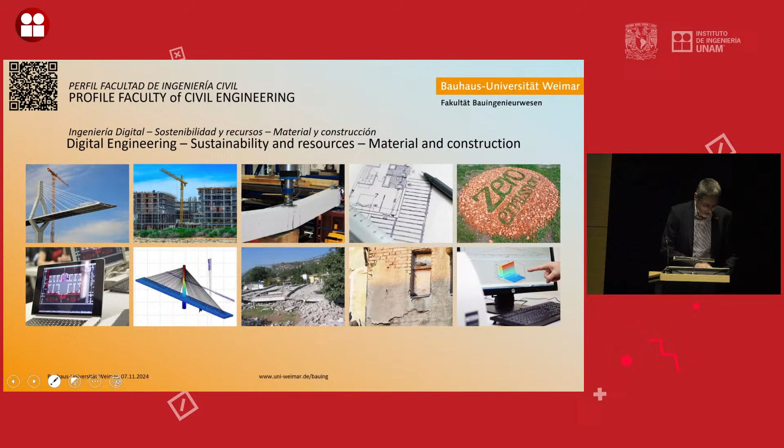As some key aspects, Bauhaus stands also for something, for experimenting. Bauhaus stands from our point of view for willingness to experiment, openness and creativity. So we try to combine this along our research and teaching.

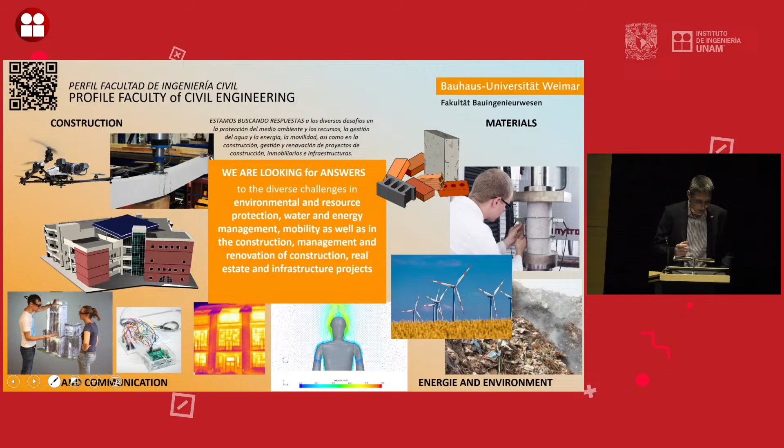So here just a brief look at what we are doing. We are using modern technologies, we are doing testing, we are in building physics. So whatever you can imagine, we are dealing with it. So in energy and environment, for example, but also very much in construction.

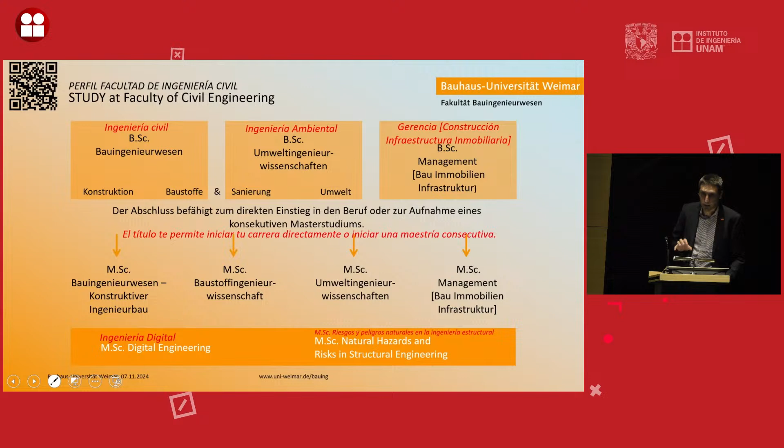And as a very brief information, we have principally 3 different bachelor degrees, which are held in German language only. And then we have some consecutive master studies programs. Some of them are fully taught in German, but we also have 2 English language master courses.

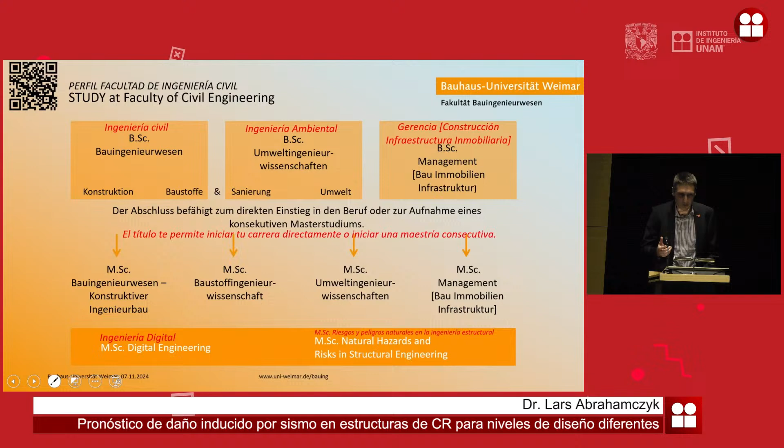One is dealing with digital engineering, so this is on the bridge between informatics and engineering, and especially from media informatics. And we have this master course, Natural Hazards and Risks in Structural Engineering, which addresses natural hazards in the sense of a structural engineer. So we as the structural engineer will deal a lot with natural hazards, but at the end we are still a structural engineer.

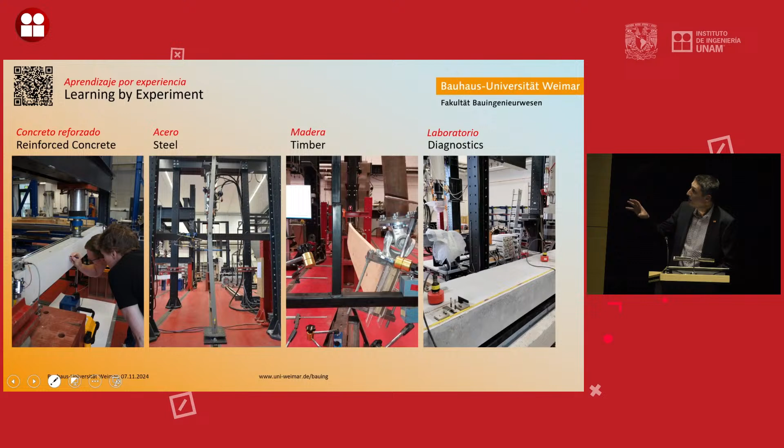So if you look a little bit more into this program, we try to learn from experiments, because we are Bauhaus, so we do a lot of experiments in our facilities, doesn't matter which type of material, reinforced concrete, steel, timber. We have a lot of stuff for doing diagnostics.

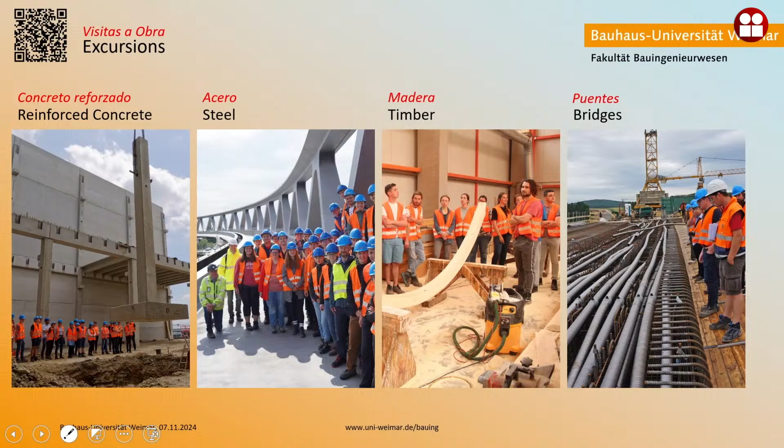But we also go on excursions with our students to visit construction sites, to really learn from the practice. And also here we do it for reinforced concrete, steel, timber, bridges, whatever is in the vicinity, we try to visit together with our students.

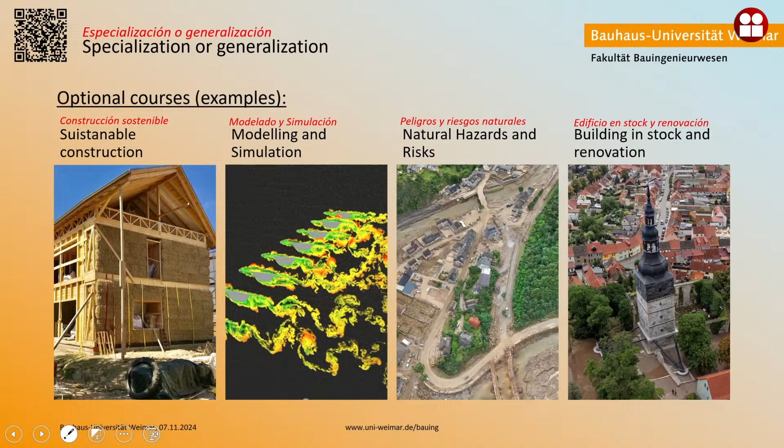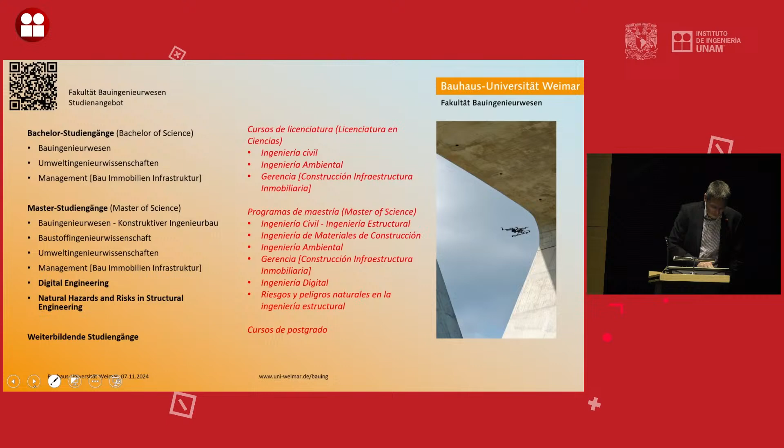But as I mentioned, we also do a lot in the direction of natural hazards and the evaluation of our building stock. We do some project thesis. We are part of the global teamwork project. We do structural design, bridge design, and this is, I think, quite common among the different universities. So if you want to get more about the study program, feel free to approach me, and then we can discuss this.

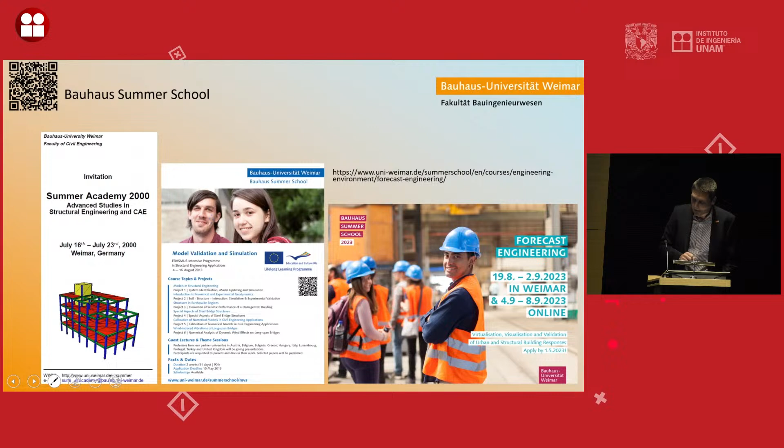And 2 more slides about the master study program, natural hazards. You might imagine, why natural hazards in Germany? Because we have natural hazards as well. Might be not strong earthquakes, but we have flood events, we have storm events, but we also have a tradition to deal with earthquakes because we went into the field to learn from earthquakes, and our target is not only the German market, so we are addressing actually national, regional, and international students.

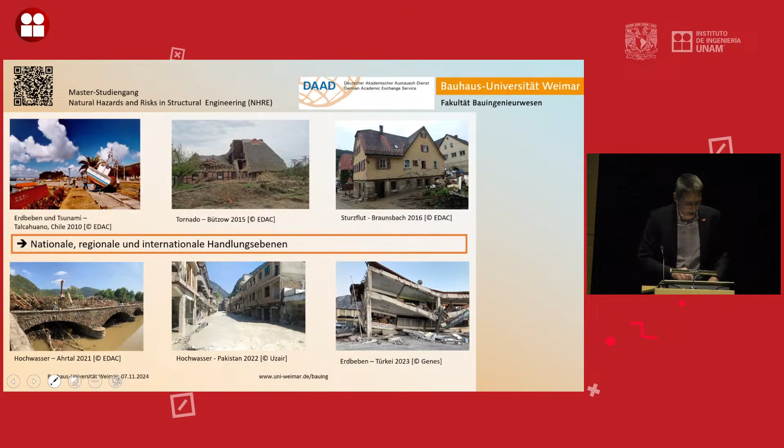And what we do is we actually try to cover the whole cycle of resilience or recovery, or the process of a natural hazard. So we have to deal with aspects before an event, during the event, after the event, and if you are after an event, you are again before an event. So that's always the cycle, and this is what we train our students in this study program.

So if you would like to know more, we can discuss it afterwards. This gives you a brief idea about what we are doing in Weimar as a small university with, from my point of view, quite powerful topics.

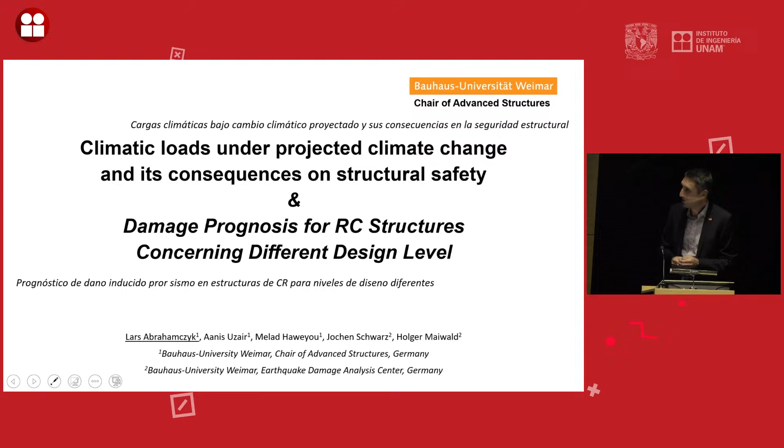So now I would like to talk about two things. Differently from the announcement, I will start with the climatic loads, and then I come to the damage prognosis, because the climatic loads is a little shorter one and hopefully also quite interesting for you. So what is the starting point? I think everybody knows climate change is there. This we don't have to discuss anymore. There are many people who have talked about that.

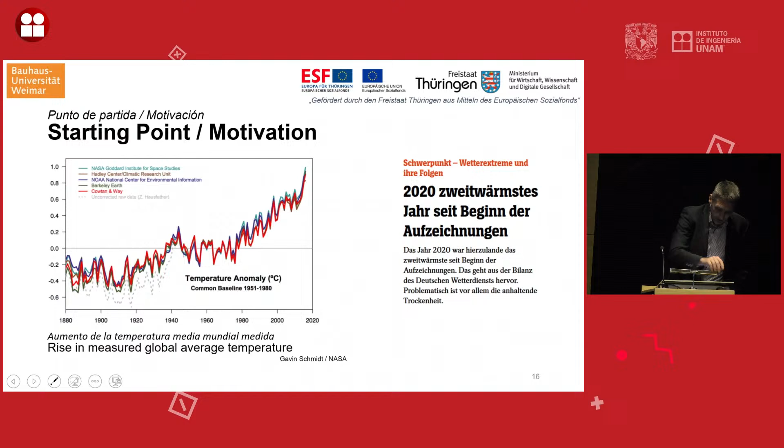But we ask ourselves, what does it cost us as structural engineers? What might we have to change in our design practice? And the starting point, of course, for the motivation is the increase of temperature, what we have already seen, what is always discussed. And of course, motivation is also some observations. This is quite locally.

So in the last, I think it was 2005 or something like that, we had a very heavy ice storm in Germany, which caused collapse of our power lines. Because at that day there was a lot of ice hanging around the cables, and the cables got so heavy that the masts couldn't carry them anymore. And that was due to a climate effect.

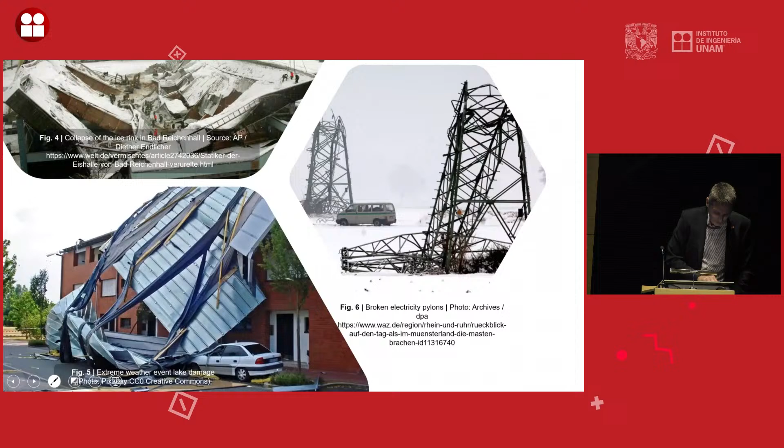On the other hand, you might see some storm events, and the upper one is also a heavy snow load on a roof, which caused the collapse. So that means there are effects which are structurally relevant. And what we did, we investigated two aspects. We had a project funded by the federal state of Thuringia, and we investigated the structural integrity and the room climate. Room climate I will keep a little bit separate. I will just focus on the structural integrity.

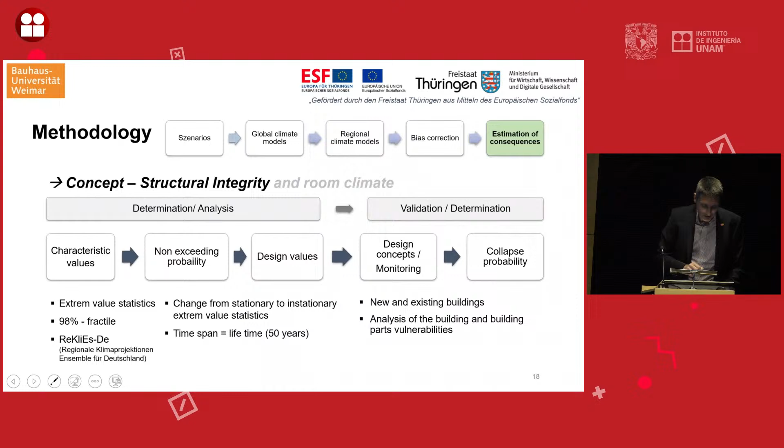And so we had to go into the analysis of the recent climate data and the predicted climate data, and then to look into the design concepts, the design values, and at the end to look into the probabilities. And similarly, we did it for the room climate, but let's go a little bit fast. So what is the methodology? First of all, we look to the scenarios. I think the scenarios are quite known nowadays, because it was talked about a lot.

So now the methodology. What we did, we looked at the global climate models, which are done by the climate people. They produce these kinds of global models where you can see how the temperature will increase over the whole world, and you see areas which really increase in temperature, but the question was, what does it mean locally?

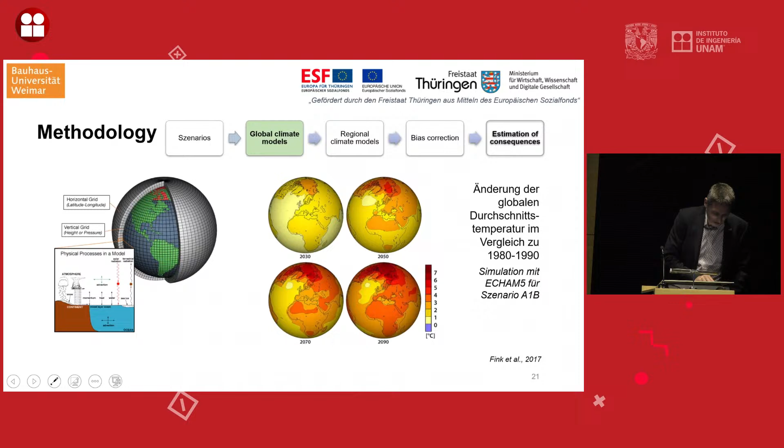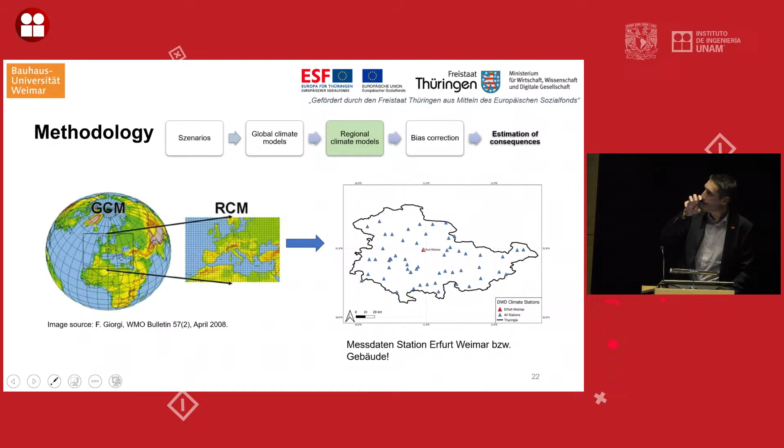So that means from the global model we had to study the regional model. We took out of the global model these regional models, which is also still done by the climate people, and then we looked to some climate stations in our federal state, Thuringia, where we are in Germany, just a small piece of Germany, to take the global model to the regional model, bring it to the local point, and then investigate it more. And for that, there's one step in between.

Typically you look to the historical data, and then you add the simulated data. And at the same time, you can compare this with the measured data. So the people from climate do some historical simulation and some prediction simulation, to look into the future. And beside that, you have the real measured data, and this doesn't fit perfectly or not at all, and that's why you have to do a so-called bias correction. You have to adjust this so that you are in the same line.

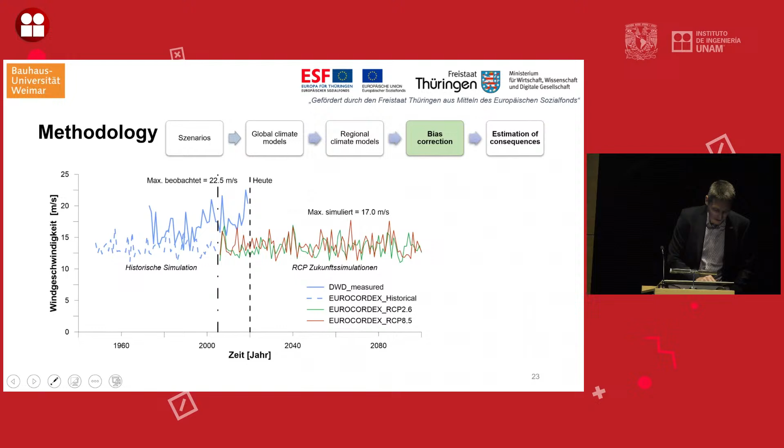Beside that, we developed, for research purposes, 2 stations to measure our own data, so that we can derive the proper data. But what is now the methodology? I think that's a little bit interesting. We have the climate data, the raw climate projection, we have the observation, we do the bias-corrected climate projection, and then we have to do the extreme value analysis.

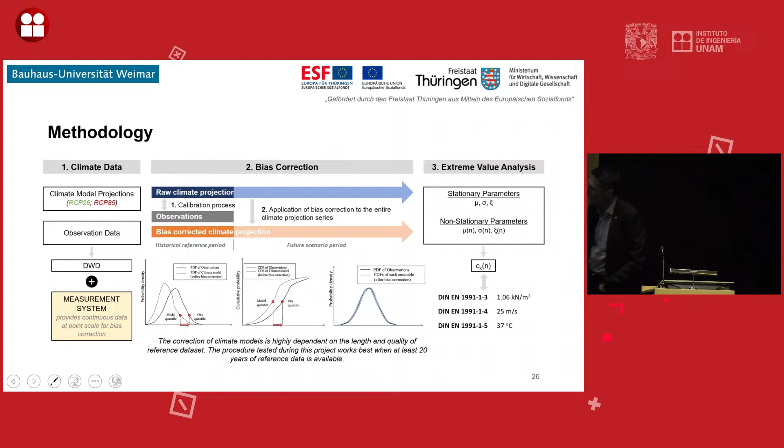Because what happens now is that the climate isn't steady anymore. Due to climate change, we can't actually look into the past because the physics has changed. And that's actually the key problem, why we have to do some extreme value analysis to make some predictions, because at the end of the day, this part here changes in probability, and this is actually the part which defines our design values, or the characteristic values which we take into consideration to design structures.

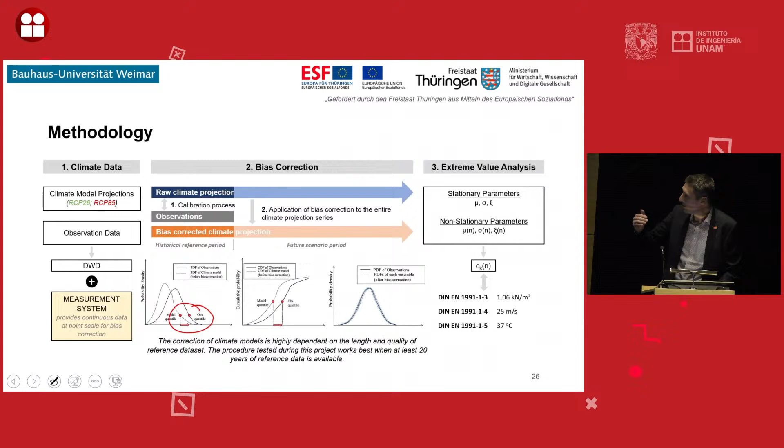And because the extremes change, the tail in our probability distribution changes, and this is what we have studied here. And we compared this for the German standards with respect to temperature, wind, and snow.

And therefore, what we did, we took the 2 climate projections, the RCP 2.6 scenario and the 8.5 scenario, and there are a couple of climate models. There is not only one model. There are many, and at the end you have to study all to see what might be the final result. At the end, you still are in a range how this weather might become in the near future.

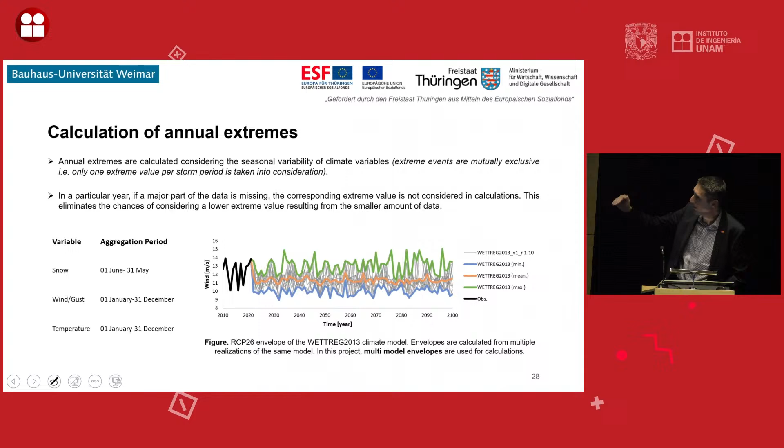So then you have to aggregate the data. So here you see different ones. So one scenario with mean, min, and maximum. And then you have your observation, and this you have to compile and do some analysis.

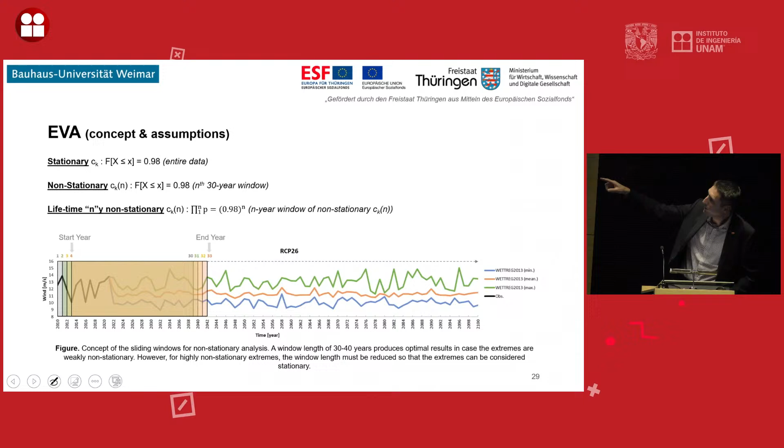And for the extreme value analysis, in the past we used the stationary approach, where we take a time window of 50 years and look into the probabilities for this data set. And in the past, we could say the quantile is 0.98, or this 2% probability, and this for the stationary approach, assuming that it was the same over the last years.

But now it changes, and then actually you can't go with a stationary approach anymore. You have to go to a non-stationary approach, and typically you take time windows of 30 to 40 years, and then you shift this into the future to calculate your probabilities. And if you do that, you can come up with some probabilities, and you can look at, for the given probability according to your code, how things might change.

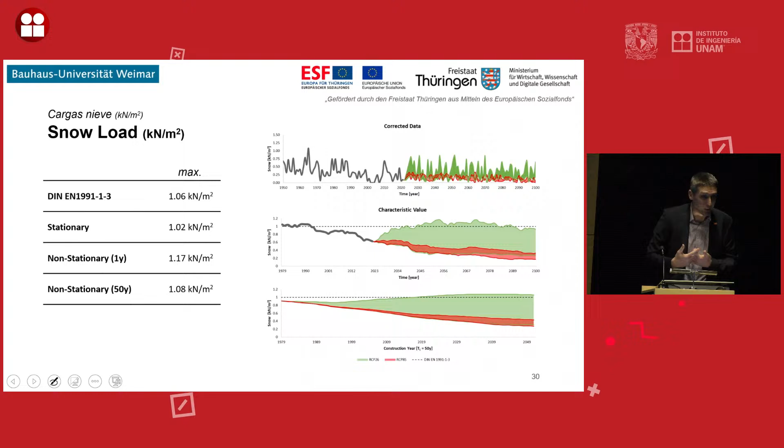And here we see, for example, the snow load. Of course, due to climate change, we increase the temperature, so the snow load probably decreases. But that's not always the case. There are also some scenarios where it still increases. So the green one would be the scenario that we manage our climate, and the red one is the worst scenario. And of course, for the worst scenario, we have an increase in the temperature and a decrease in the snow load, for our particular region.

So at the end, this is very much addressed to what we have on the local side. Of course, there will be regions in the world which get colder, and then you have to adapt this for that particular region.

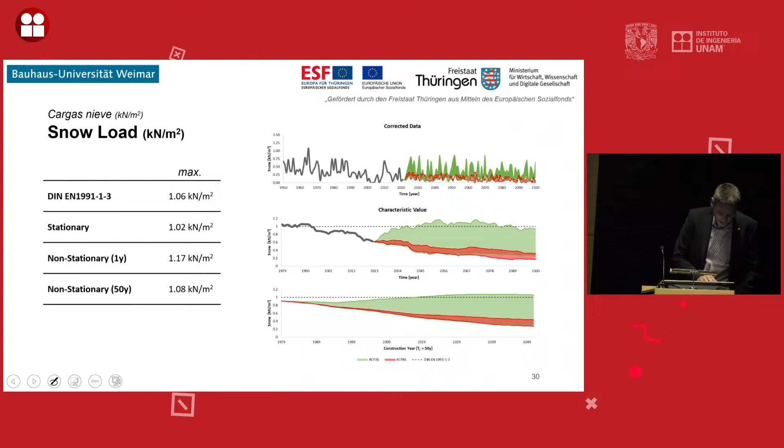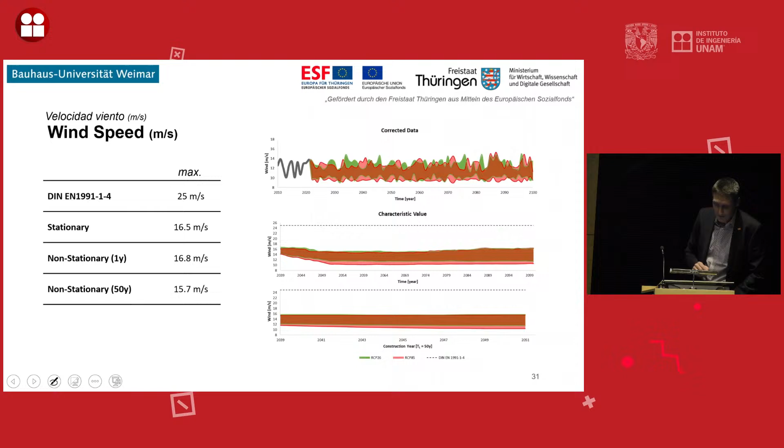So if you look at the wind speed, wind is also quite uncertain, I would say, because here you see not that much difference between the models. This is something which is not well solved in the climate change models yet. So we couldn't really identify a trend. It's more or less straight, independent of how much the temperature changes or which scenario you are in. So from the wind, we couldn't observe too much.

The same if you look at the gust wind speed, there we also didn't find too much. The problem here is that in the climate models, we actually don't see real storms. What is classified as a storm is difficult to extract out of the climate models. So from that point of view, the data doesn't help us too much.

But of course, the most trend you see in temperature, and temperature is something which might be relevant for design, not for every building, but for temperature-prone structures which have an expansion, like bridges, for example. And there we could definitely observe a trend in how the temperature will change, similar to what others have predicted, but now in the sense of the probabilistic approach, how much it might be relevant to our design concept in the future.

And now the problem which results out of that is, in the past, our design philosophy was looking into the past and taking the same into the future. That means looking in the past, calculating a probability, 2% exceedance probability, and taking it into the future as well. But now the temperature increases in the future, and it doesn't work anymore.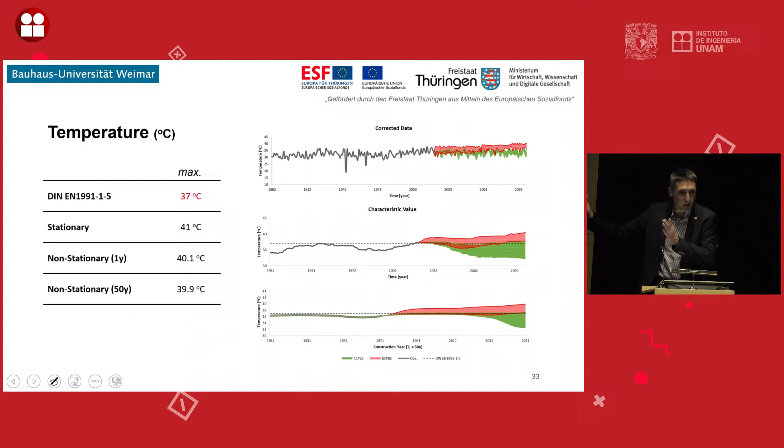And that actually leads to many distributions. So temperature, for a building lifetime of 50 years, from 2051 to 2100, if we go into the non-stationary concept, we reach a temperature between 38.5 and 40.5 degrees. But the question is, how do we now consider our probability? So far we say 2% probability in 50 years, 0.02. But the question is now how to sum it up.

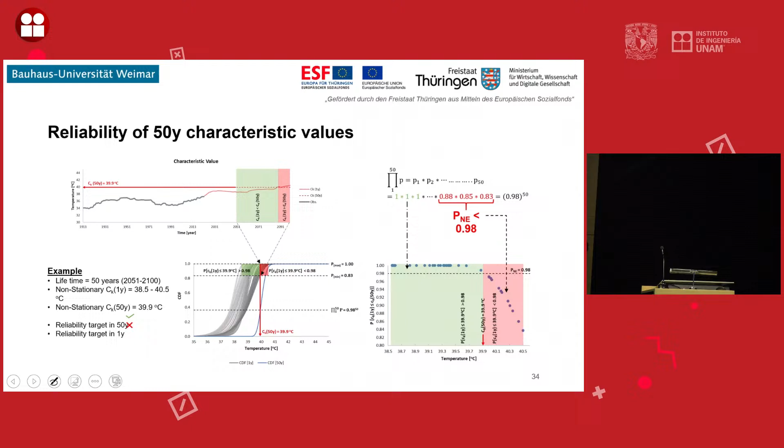This happens from time to time, or every year more than 2%. But the question is, how do we see this over the whole lifetime of the building? Do we accept more often in the future an increase of the temperature? Because that's the probability concept: we accept a certain probability that our design value or characteristic value is exceeded.

We could say we don't accept it for a very long time, but at the end of the lifetime of the building, it will be accepted. Or we say, very conservatively, that the whole probability should still be this 2%. This is a philosophical question which we can't answer, because this is a community problem, how to deal with this increase in the future.

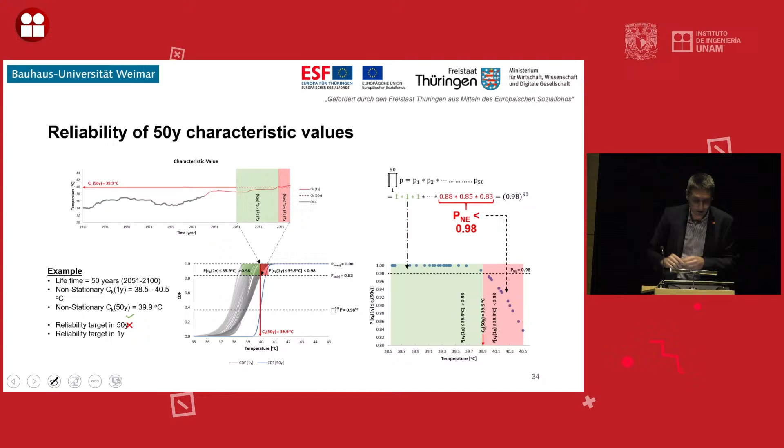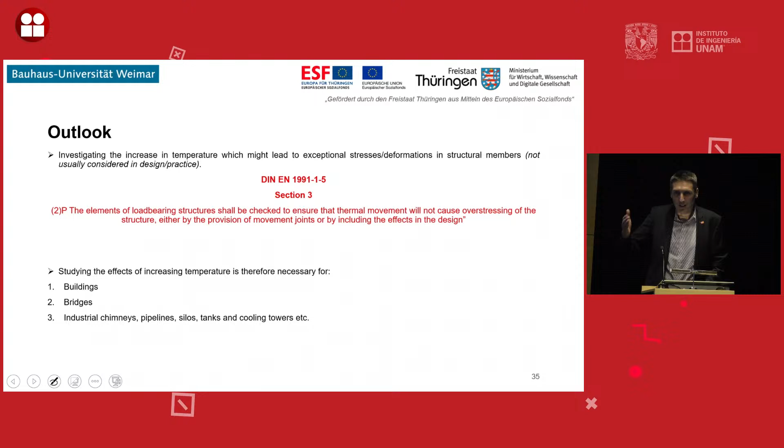So that means, from our point of view, this should be studied much more, especially with respect to local situations, how climate change affects our design, and how it will affect our existing buildings, because they are not designed for that. They are designed for a certain temperature or wind speed, which will definitely be exceeded in the near future, and not only once, but maybe twice, three, four times. Then we are out of our design philosophy. So this is a starting point to give you some ideas where you might work in the future, or what we have to deal with as structural engineers.

Now I would like to come back to some challenges in the damage prognosis, particularly with respect to reinforced concrete structures, what we have worked on in the past and what is still ongoing research in our department, in my chair. As a starting point, I think this is also something you are quite familiar with: the relation between hazard, vulnerability, and risk.

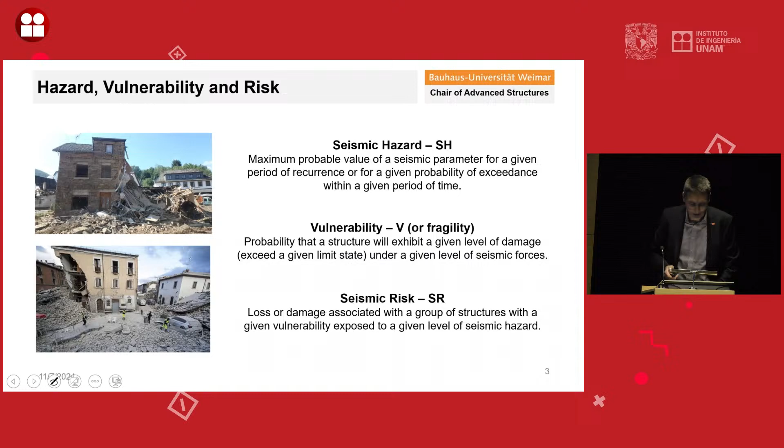Hazard is the maximum probable value of a seismic parameter, so that describes the event. Vulnerability describes how structures perform. And risk is nothing else than the multiplication of hazard with vulnerability, might be multiplied by loss, and you get a risk value. So this is a starting point.

As a motivation, of course, there are past events which always give us some task to deal with this topic and how to improve the structures. How can we determine the risk, to communicate it with the decision makers? For example, these are some damages from the Amatrice earthquake in 2016.

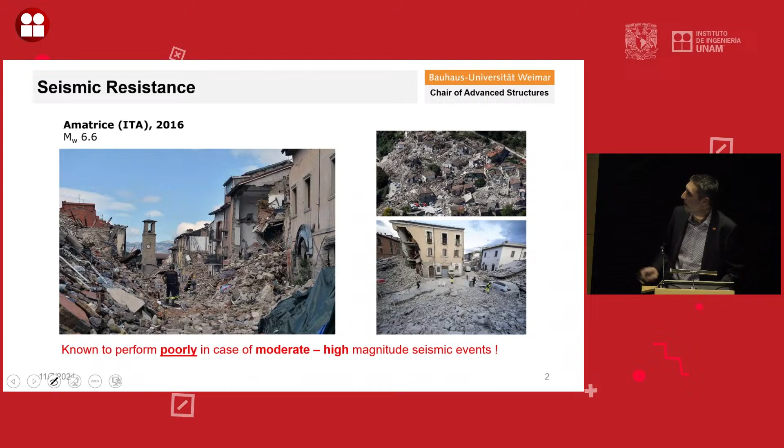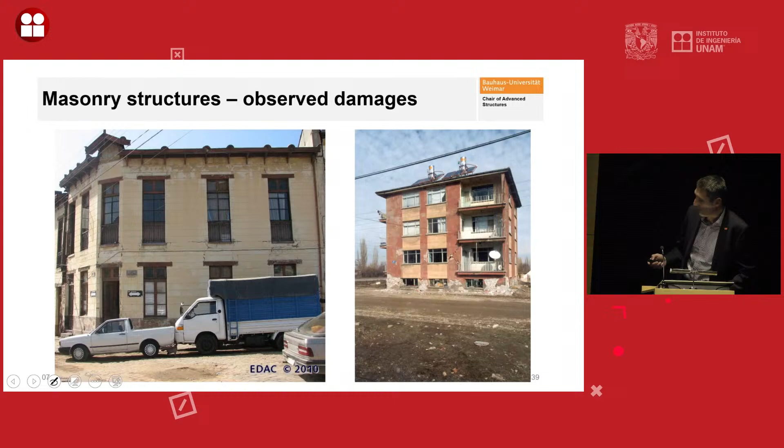Our approach comes from observation, and observation is somehow brought together in the European Macroseismic Scale. Some of you may know it, others not. The key aspect of the European Macroseismic Scale is that we have a classification of the type of structures, distinguishing masonry, reinforced concrete, steel, and so on.

And we assign to each structure a so-called vulnerability class. If we know that, then we can link the vulnerability class with the probable damage under a certain intensity. You will see this in a minute. On the other side, you can also do this analytically.

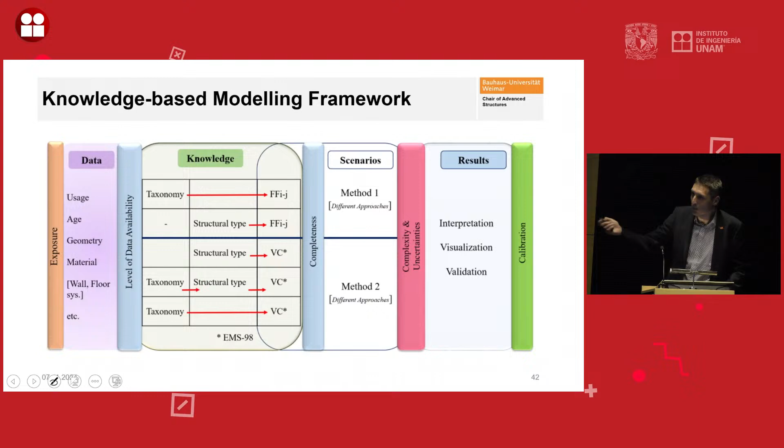You can quantify it, and the best is, of course, if you do both and compare them with each other, because there are some differences. At the end, you can interpret and visualize the results, and disseminate it. Of course, the best would be if you have an observation from a recent event where you can validate all what you have done, but this is the most difficult part. So at the end, that could be the outcome.

That's some results from a research project in the southern tip of Turkey, in the Antakya region, which was, two years ago, heavily damaged due to this heavy Turkish earthquake.

At the end, what you can communicate is for a certain intensity, what is the probable damage within the city. And of course, this is always summed up for a district, so that's the average or summary of the whole district, how it might perform. And then you can clearly see that there are areas which are highly prone to damage in case of an intensity 10 earthquake, and what you can expect.

So therefore, to do that, as I already mentioned, you need a building taxonomy, or the typology. Nowadays, there are many of them. There are rather simple and robust ones, for example the EMS or the HAZUS, so there are quite limited numbers as you have seen.

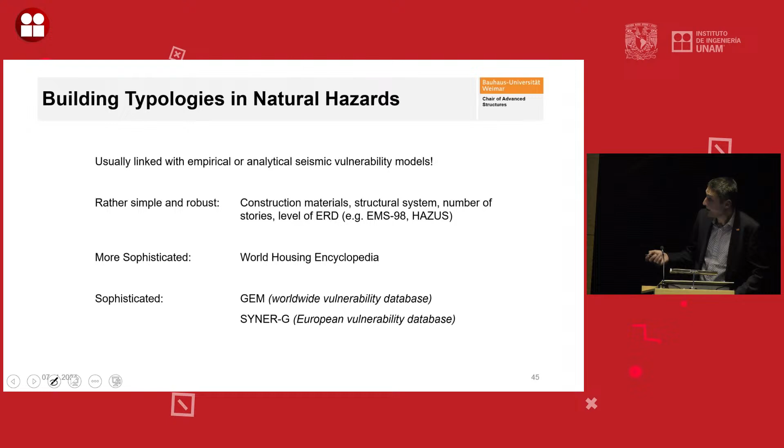The more sophisticated one is from the World Housing Encyclopedia. And very sophisticated ones are, for example, by the Global Earthquake Model. You will see it in a minute, and you could have a look at it.

So they always use different construction materials and load-bearing systems. These are the classification criteria considered in these typologies. And here you see also how many types they distinguish, rather fast.

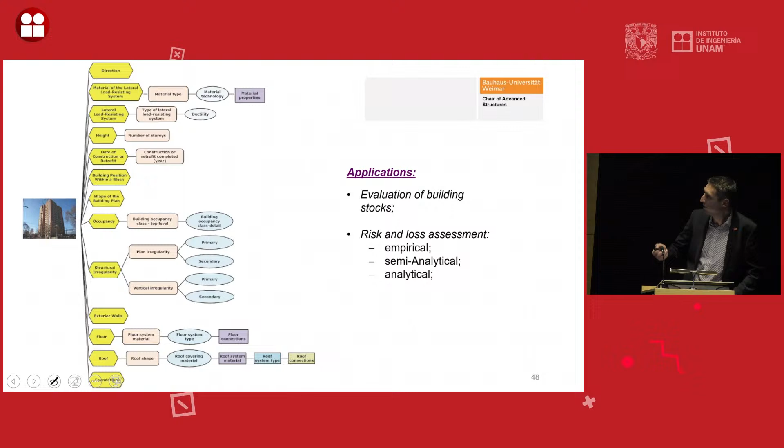This is the typology from the Global Earthquake Model, and you see there are a lot of parameters you need to know to assign a certain type of structure, which you later use for predicting the damage.

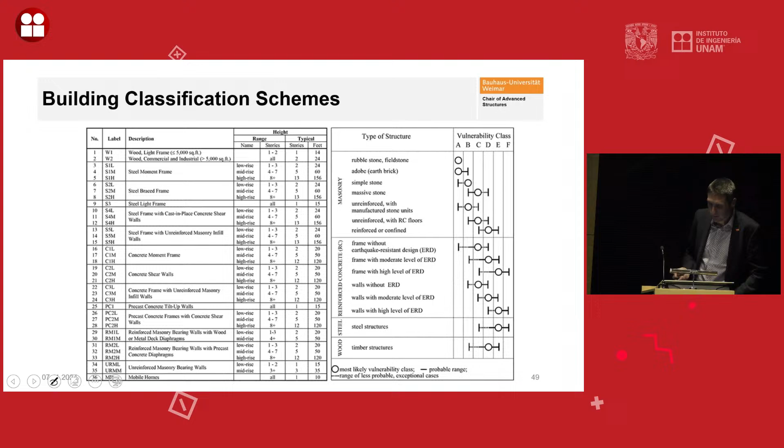And here, as a last one, this is the HAZUS, and this is the very small one, let's say, but a very robust one, for the EMS 98. So I will come back to that in a minute.

So, now what's the aim of the European Macroseismic Scale? On one side, we have the building types, so we classify our buildings according to the main material or structural system. And then we assign to it a so-called vulnerability class.

Now the question could be, why do I have to distinguish types of structures, or why don't I distinguish them? And the answer is, how do they behave under seismic action? If they behave quite similarly, then we can consider them as having the same vulnerability. For example, if we have unreinforced masonry with reinforced concrete floors, the most likely vulnerability class would be C.

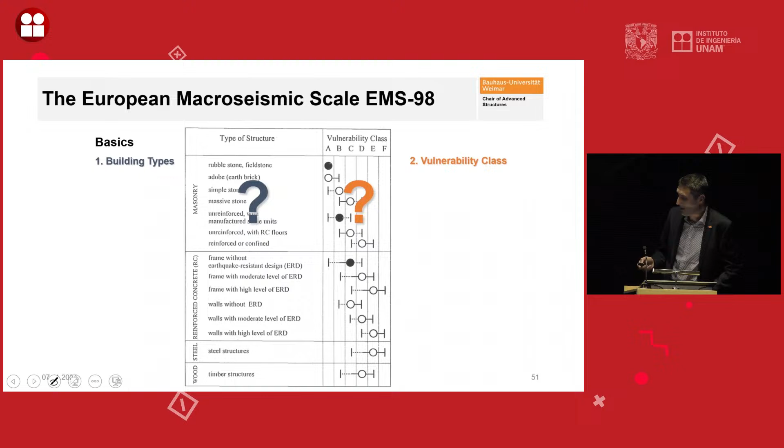And if we are looking at a reinforced concrete frame with a low code or with no earthquake-resistant design, so not following any design rules for earthquakes, it's also in class C. That means if they are standing next to each other under an earthquake, they behave similarly. So that's the idea, to look into the buildings from the observation point of view, how they perform under seismic action.

That means vulnerability expresses the differences in the way buildings respond to earthquake shaking.

So if one building type performs better than the other, it can be said that it had a lower vulnerability, but it can also be affected and modified by the engineer directly. So that was the ranges which we have seen.

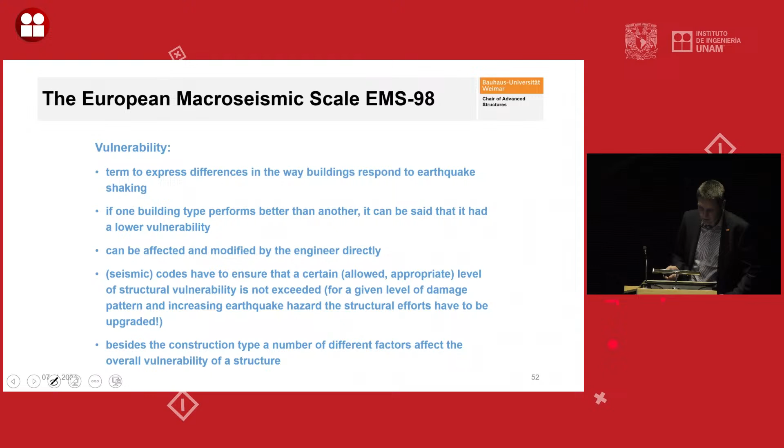And then the nice thing is that this is actually linked to some damage description. That was the new aspect within the European macroseismic scale, that now for intensity 7, we have the description for buildings, because at a certain intensity, it causes damage to buildings. For low intensities, it's typically just felt by some people. So that is how intensity is described. Lower intensities are typically described by how people have felt it or how furniture or things have performed.

But if you have larger shaking effects, then we are looking at the structures, how the structures perform. The origin of that was actually to say, let's use this to describe the intensity and to distinguish it between the different earthquakes. It was more to determine what intensity has been observed than rather to do a prediction, but it could be used also for a prediction later on.

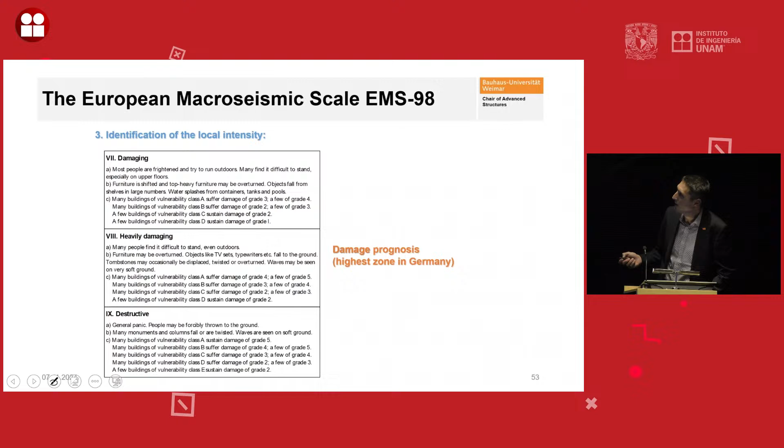That means now we could say, if we have an intensity 7 earthquake, that many buildings of vulnerability class A, which are, for example, adobe structures, will have a damage of grade 3, and a few of them will have damage grade 4. So damage grade 3 is moderate damage, damage grade 4 is partial collapse. You will see it in a minute.

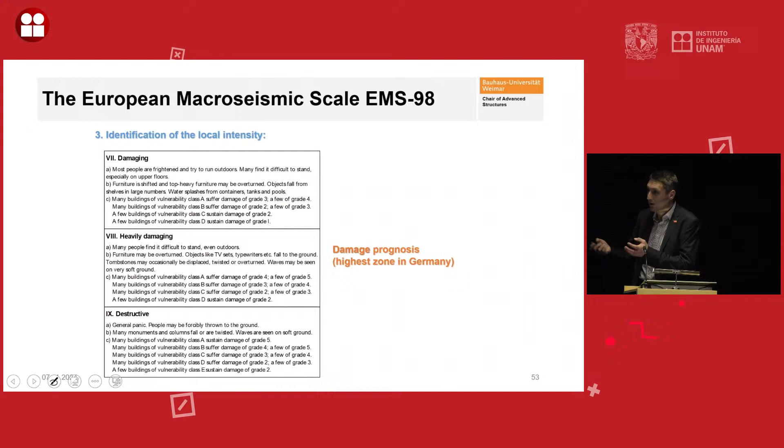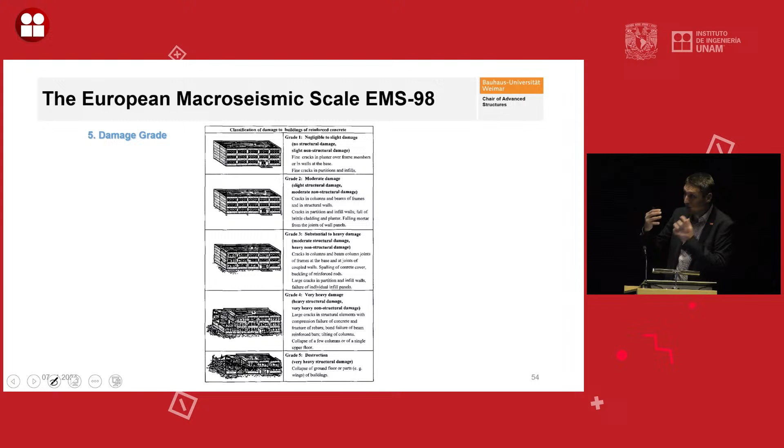And this is actually the nice thing, they also added some damage description. So what does it mean, a damage grade 3? In case of a reinforced concrete structure, it means moderate structural damage and heavy non-structural damage. So please try to keep this in mind, that we always distinguish one damage grade higher for the non-structural elements than for the structural. So that was the principal idea of the European macroseismic scale.

So that means at the end, for certain intensities, so intensity is slightly damaging, you always have this description, and then you can either use this to determine the intensity in this certain area, or use this to make a prediction for a certain intensity earthquake. And the same, we have also some description for masonry structures.

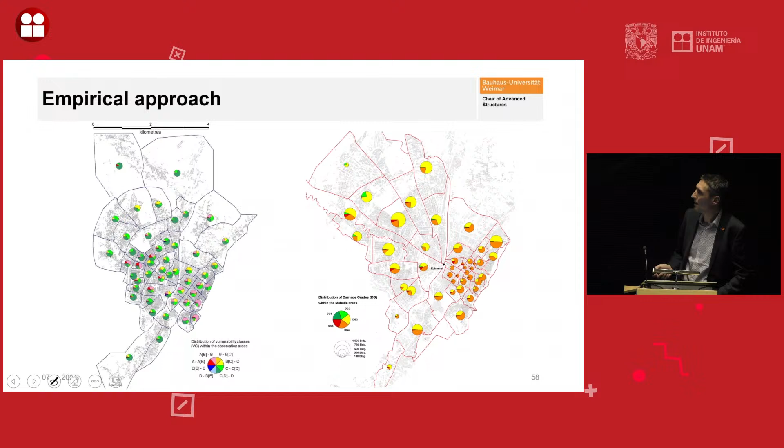And this is what we have used, for example, in our case study in Turkey. Based on the vulnerability classes which we have assigned to each building, we can come up with a prognosis, using some intensity attenuation functions. So depending on where you place your epicenter, here or somewhere there, you can determine at each location what is the local intensity, and this you link with the vulnerability. Quite straightforward. And then you can get to such results.

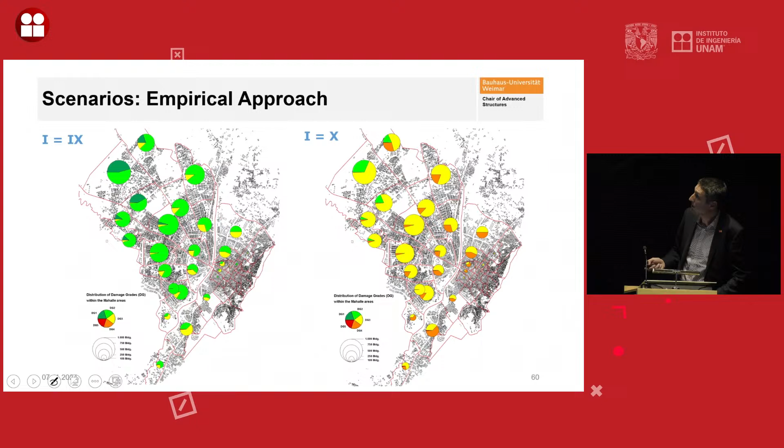If you have this, then you can also combine this with some casualty scenarios. So you're using the amount of damage to now calculate what are the probable casualties in case of such an event. Here we had to distinguish between daytime and nighttime, because in daytime, most of the inhabitants which are living here are working somewhere, and in the night they are back home, and then the number of people might increase in these vulnerable buildings.

So how to do that now? At the end of the day, if we want to do a vulnerability assessment, we have different strategies, but what we need is actually the hazard, some information about the subsoil condition and the building stock, and then we can come up with some damage scenarios. Depending on the methods you apply, typically we have a typology to distinguish or classify our building stock. We can use a vulnerability assessment or fragility functions. And the best is, of course, if we combine this with a survey, so that we don't rely just on statistical data, that we really look into the building stock which you observe.

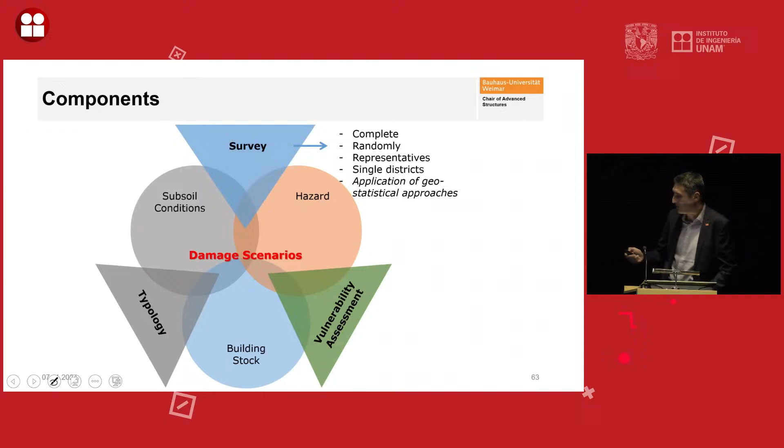And now you could think about either assessing building by building, doing a numerical analysis, if you want to do it for Mexico City. I'm not sure how long you will need, but probably it takes too long before the next earthquake will happen. So that's why we need some other methods. That means we should either go with a simple one or then a very detailed one.

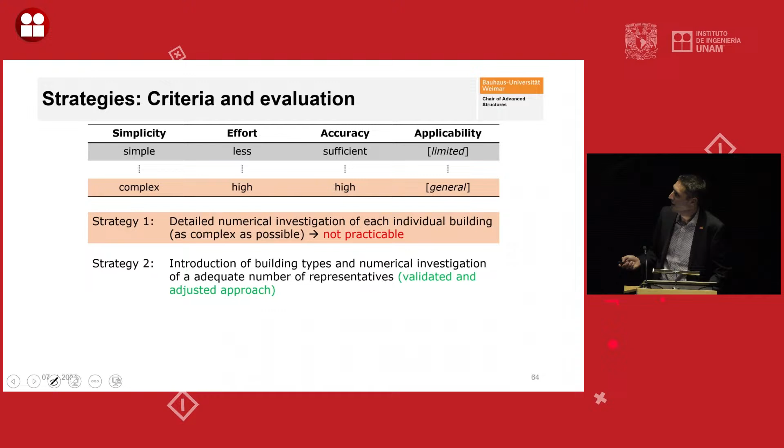And this is what we did. We did a rather simple one within this project. We looked into the building stock. So what we have done is we did a survey between 2005 and 2007. Now it's a couple of years ago, and we went to the city and we assigned to each building certain parameters. And the parameters were derived from the European macroseismic scale to determine the vulnerability.

What we need is the material—in that case, reinforced concrete. So we put an index for the number of stories, because the number of floors plays a role in the vulnerability. Then what type of building it is, residential or commercial, and if there are particularities like a soft story or others.

So we went through the city and assigned this to every building, and based on this data set we could perform the results which you have already seen. At the end of the day we had this overview, and here you could see there is a large portion of reinforced concrete structures within the city. If you link this with the construction period, you might have an idea how well these reinforced concrete structures were designed.

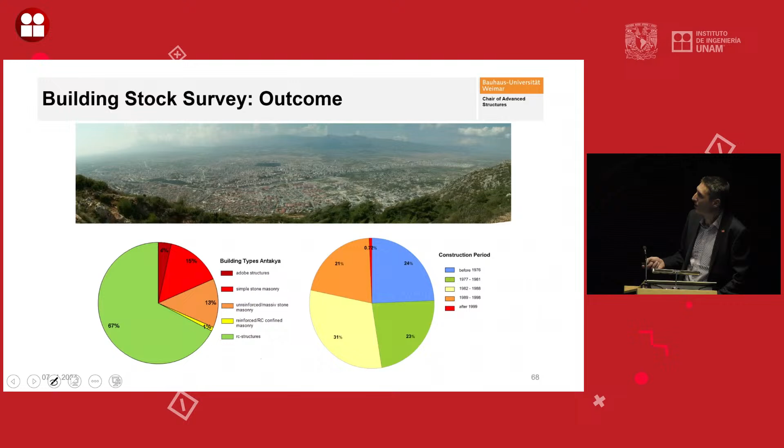Whereas in the case of Antakya, it was a little difficult, as we had to observe this during the very devastating earthquakes. Here are some examples of how the buildings look and how we could classify them—reinforced concrete structure is rather clear.

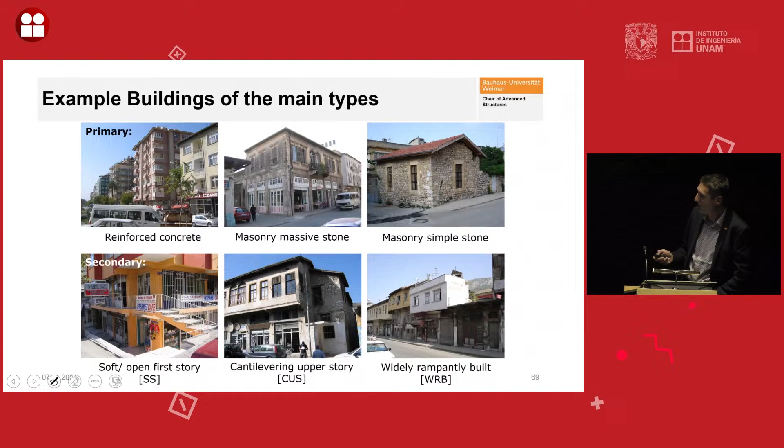Soft story was quite common in this region, but also in the older type of buildings you had an increase of the upper floors, which we called a cantilevering upper story. And then we added a parameter, widely rampantly built, to consider that the floors are at different heights and that the buildings are widely attached to each other, which is definitely not good in case of a seismic event.

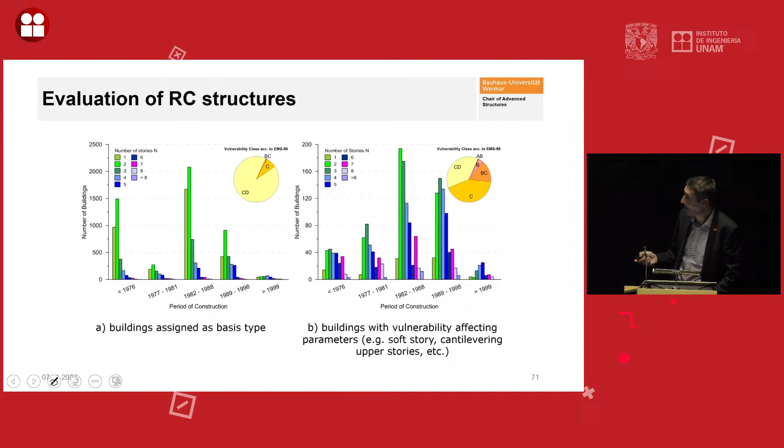So based on the data we collected, we did this classification, and then you could do some statistics—number of stories, construction period—and get a composition of the vulnerability class. And then the interesting thing is this very difficult graph.

The second thing we did, as I mentioned, you can do analytically using analytical functions, typically provided as fragility functions. That's nothing else than the probability of exceedance of a certain damage grade, related to the peak ground acceleration as the hazard parameter. Sometimes you can also use spectral acceleration or intensity, depending on the functions you use.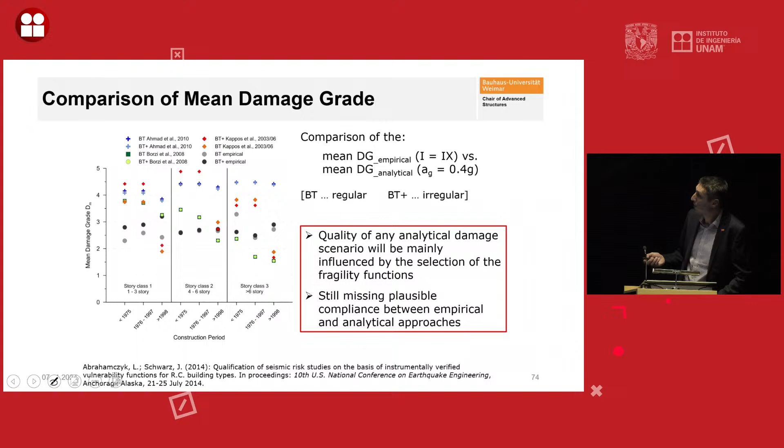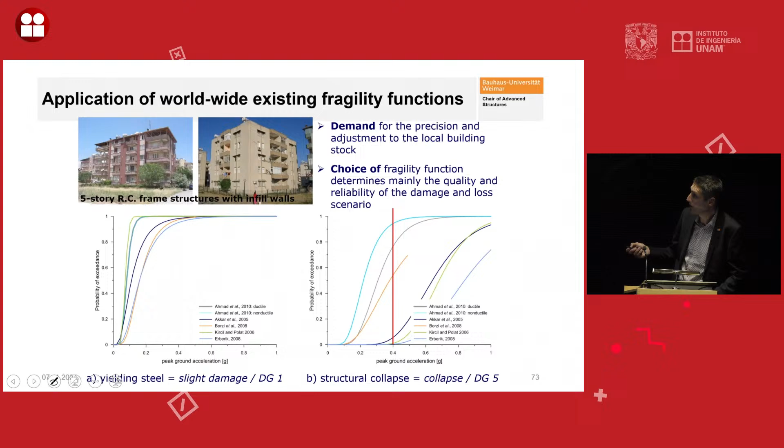And keeping this in mind, that we have this variation in the fragility function, especially for reinforced concrete structures, this brought us to another topic: what does it mean if I have different levels of earthquake resistant design? First of all, what is earthquake resistant design? Let's try to discuss this on the basis of the pushover curve or the seismic capacities.

Typically, if you run a pushover curve, you have base shear versus displacement, and you say, okay, my structure will face different damages, and some of them are acceptable and others not, depending on your design code.

But in case of an earthquake resistant design, that means I follow a different standard, with a certain ductility factor for example. But that also means I have an acceptable limit of damage. I accept damage. That also means that my structure will be damaged in case of an earthquake, especially if I have a design earthquake, I will have damage.

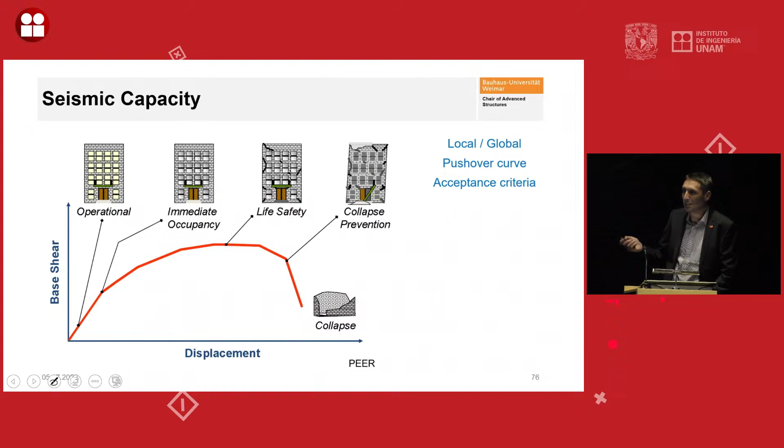So that's now the big question: how to deal with that in the damage prognosis or prediction in scenarios, because I have an acceptable damage. And that's a big question, especially towards the behavior of the structural elements and the non-structural elements. And this is what we tried to study.

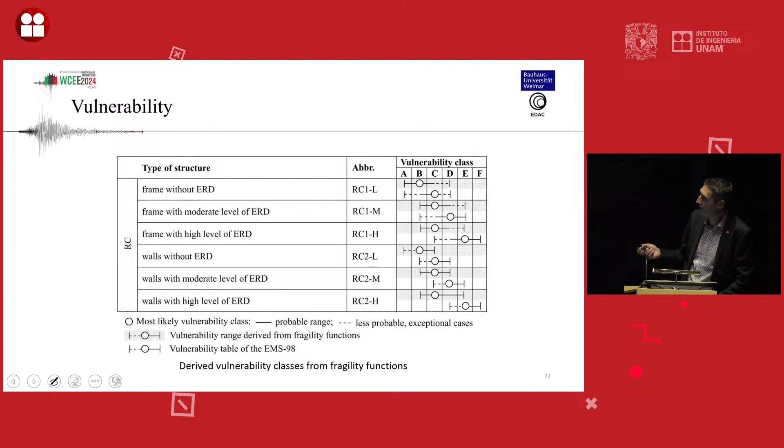Coming back to the vulnerability class, typically we say, okay, a frame without earthquake resistant design, not following any code, has a rather high vulnerability, between B and C. If I follow a moderate level or a certain design code, then I get a much better performance. But that's just describing the vulnerability, not the probable damage, because the damage can be more or less the same, because I allow damage. And that is actually the key question of our research.

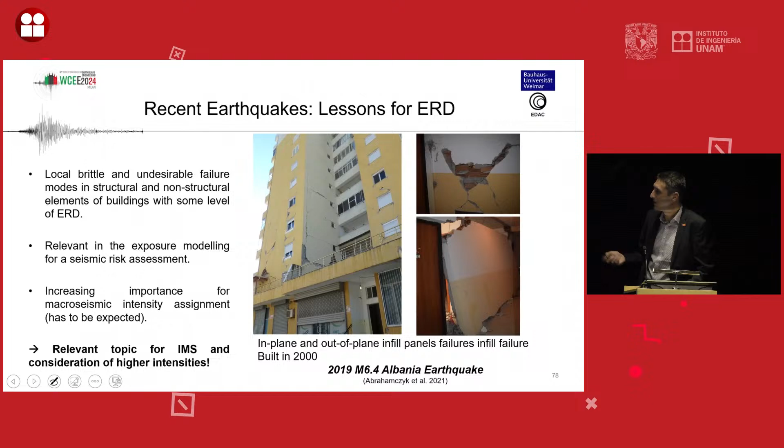And this is actually also what we found in the Albania earthquake, that the frames performed quite well because they were designed for earthquake, but the infills failed. And now if we look into the damage description of the European macroseismic scale, there was always 1 degree difference: moderate damage in the structural system, heavy damage in the non-structural damage. But here we had actually slight damage in the structural system and collapse in the non-structural system. And that's something which should be addressed in future developments.

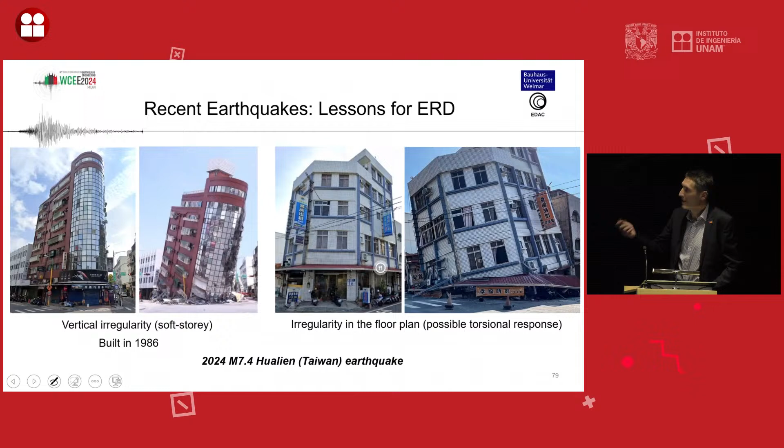On the other hand, if we looked also to the lessons we could derive from the Taiwan earthquake, for example, Taiwan is known as a very developed country in terms of earthquake-resistant design. What they have are also earthquake-resistant design structures, but they might have some vertical irregularity or irregularity in the floor plan, which possibly causes torsional response, and which then causes this damage. So that means this is a part which is rather difficult. This is what my PhD student presented at the World Conference recently, and he addressed these different challenges.

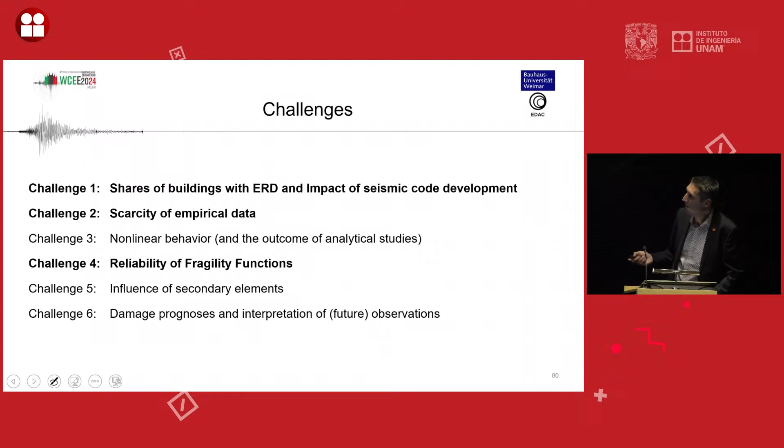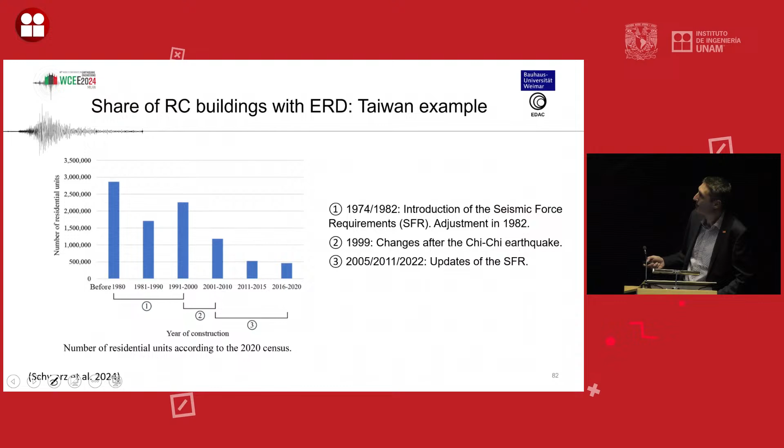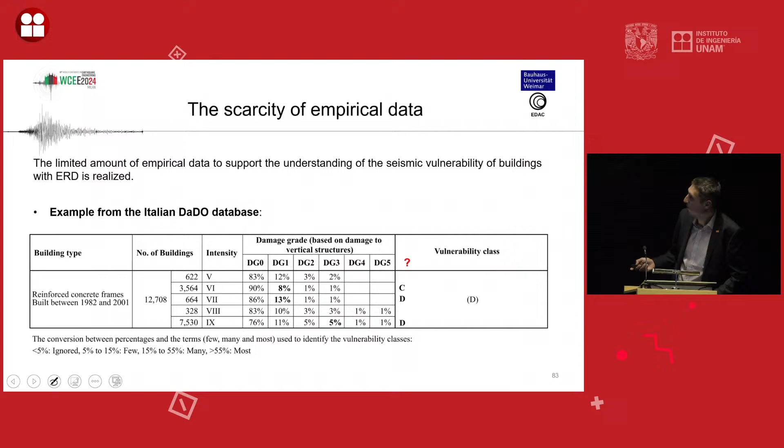But what we actually see here is that we don't have that many earthquake-resistant designed buildings which really faced an earthquake, where we can learn something. So that limits our database a little bit. And then the question is, from this information, what was the performance in the different intensity areas or sites, and which amount of damage did they face? And then, what is the right vulnerability class? Can we predict this vulnerability class based on this observation? That's why it is worth investigating.

And what's the problem? The problem is, on one hand, the observation, and on the other hand, what is already available in the literature. For example, a set of fragility functions which claim they have considered earthquake-resistant design. That means they did numerical studies for reference structures to say, okay, we have considered a certain design level. There are different regions in the world, and the description also varies, which makes it difficult, because some say I have a low code and a high code, whatever it means. Others say with earthquake-resistant design and without.

Others take into consideration the ductility class, saying I have designed structures for low, medium, or high ductility class. And others have pre-code, moderate code, high code, to address the code generation. This is where we need a proper systematic approach to derive a new definition. But at the end of the day, if you look into the existing fragility functions, we face the same problem we showed from the beginning. So we have a certain intensity measure, yielding and collapse, and low code and high code.

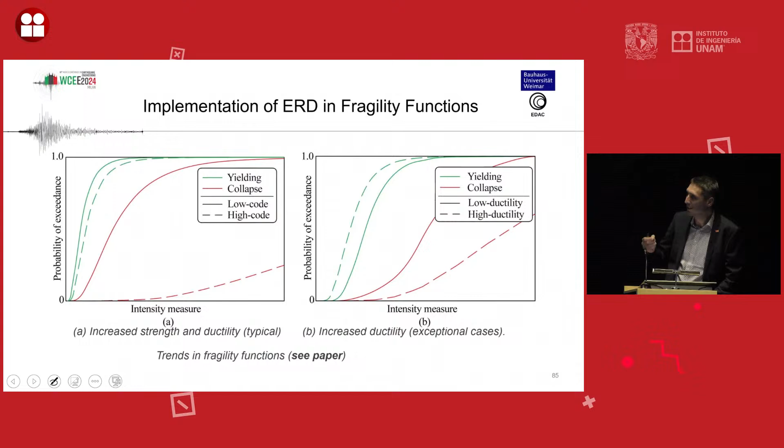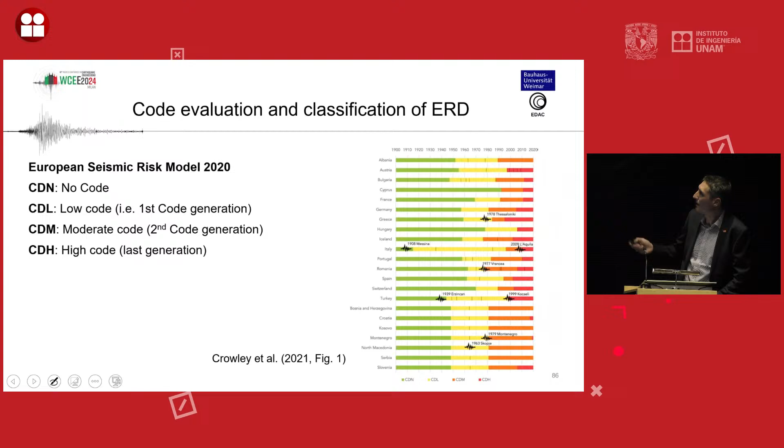Here we did a comparison of the different code levels across Europe, to distinguish the type of generation and when it was implemented in the different regions over Europe. And the question is, should this be extended by the level of seismic design? That we say, okay, we have basic seismic consideration, static force adaptation, capacity design principles, or displacement-based design. This might be better suited to distinguish these types of structures.

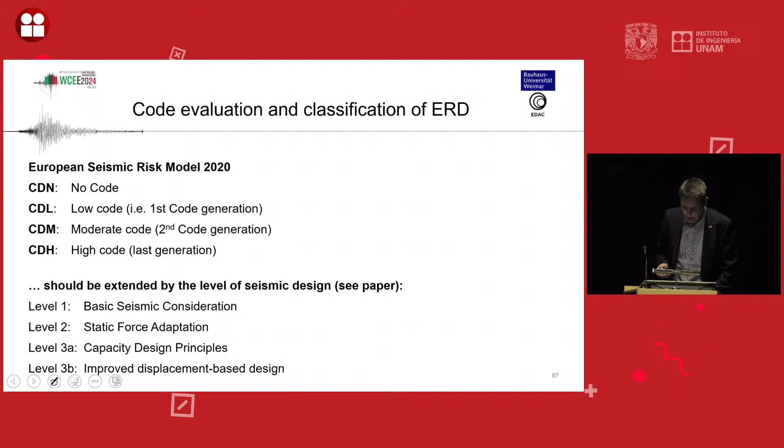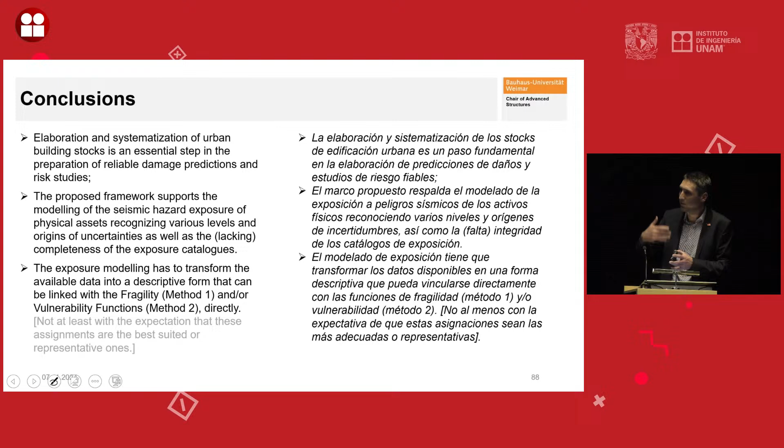Okay, this brings me to the end. This was a starting point for further discussion on how to handle earthquake-resistant design, and what might be possibilities to capture this problem better for our risk simulations. From a conclusion point of view, I will not read it here, this is something to summarize. On one hand, climate change is definitely an issue we should take care of, and it's not solved yet from the structural engineering point of view, from my perspective. On the other hand, if we're doing risk or resilience studies, we need a proper understanding of the building stock, so we can come up with good, reliable models to decrease the uncertainties in our models. Okay, now I did it too fast.